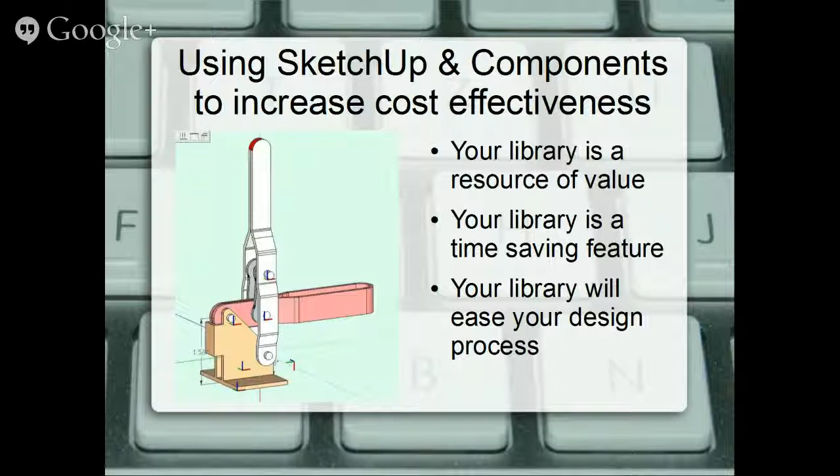With additional applets, SketchUp will improve accuracy and provide both a spreadsheet, cut list, and a pictorial layout of how to put parts on your lumber. That equals cost savings.

Then down below, you can see that it's cross-referenced with the component names. Now you can name these components whatever you want. I don't mess with it, because when I'm doing a project, if it says component 12, I look at it, I can see component 12.

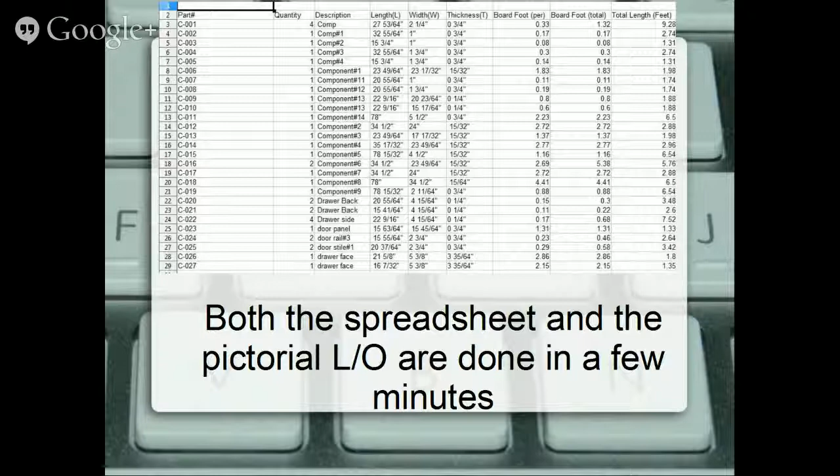Both of these outputs, once you run the applet, they call them plugins, Cutlist, they will be done in between 1 and maybe 15 minutes. I haven't run one longer than 3 minutes, but then my stuff is fairly small.

Case sides are all the same profile, same with the drawer fronts, also with the door panels. Stiles and rails also have the same profile. Now, I know you're saying, well, I make a lot of different door styles. Yes, you do. But there's got to be one that you do most of.

First, you have to isolate your bread and butter component, your bread and butter styles first. Raised panel, that's fine. Which style? These are a bunch of different styles of raised panel doors.

Are any of them better than the others? No. But what we want to do is start with your most used products to build your library from and then modify them.

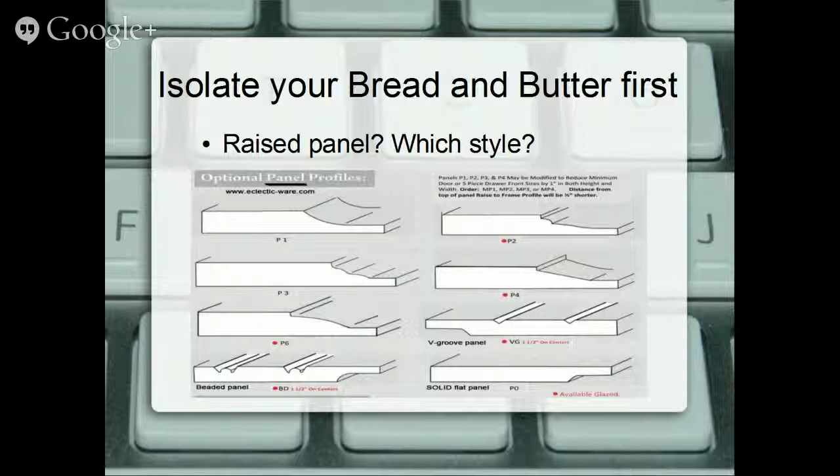My rails and stiles aren't - they're tongued and grooved. But they can be changed from that very easily. So you figure out what your main usage is and build from there.

And that's the end of the presentation, unless I missed one, which I think I did. Oh well, if I did, that's okay. Oh, I did. Okay, I will close this out. At least I'm trying to anyway.

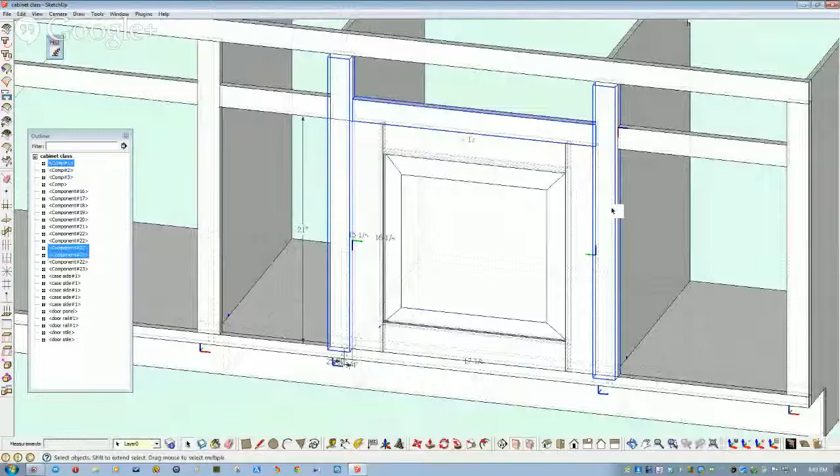This is just a simple raised panel door, tongue and grooved. You can say, well, your tongues and grooves are not right - they're not big enough, they're too big. And you're probably right. I've already admitted I really don't know what I'm doing here, but I'm trying to show you that if you do know what you're doing, it makes life a lot easier.

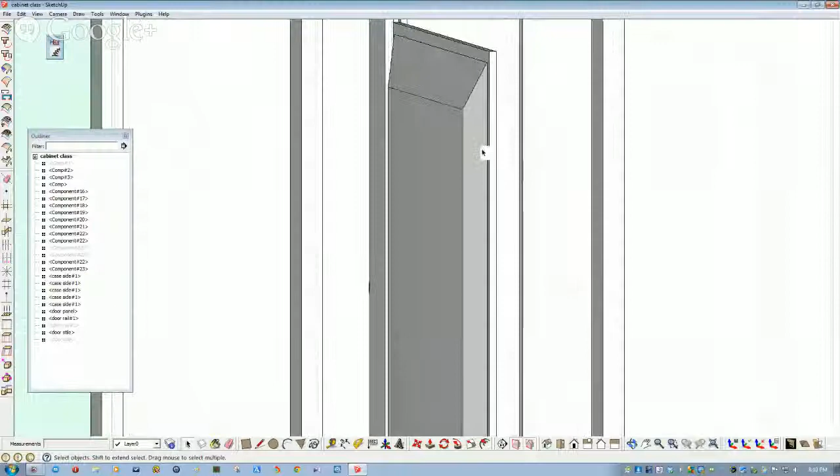So let's hide a couple more parts. And here's my simple raised panel door. Just straight cuts on it.

Now I'm going to take these parts - there are all components for my door. They're all highlighted down here, you can see in the blue. And I'm going to right-click here and make a component. And I'll call it, I think that's 24-inch door. If not, it doesn't make any difference.

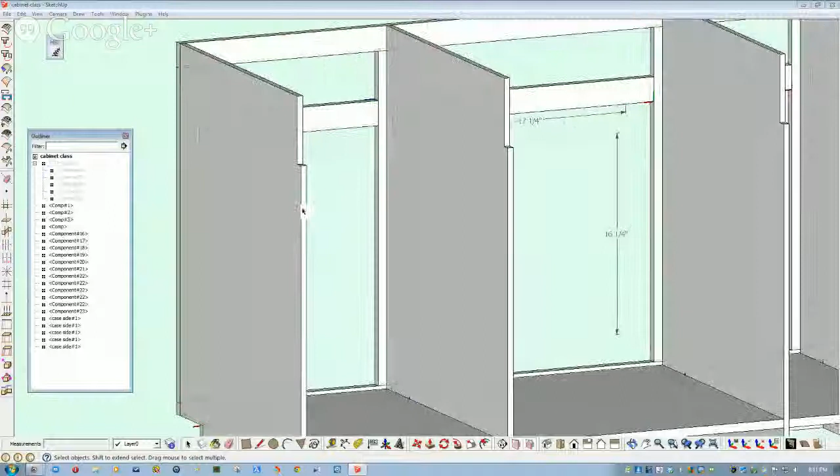Now this is now one entity that I can work with a lot easier. On my previous go-around, I had my back panel inset rabbited into here, and these were all a quarter inch narrower - 6 millimeters actually.

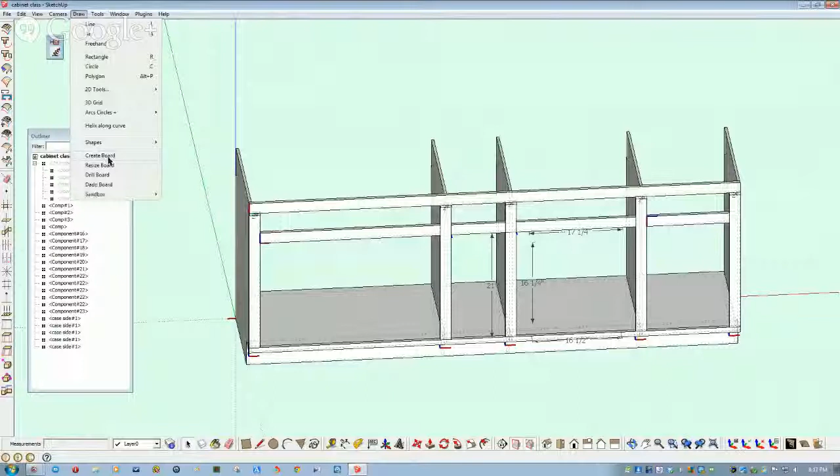Then I found out, oh, you have to have a nailing strip up here. So I just redid the whole thing. So to make a nailing strip, there's a plug-in through woodworlds.com, and you can create a board.

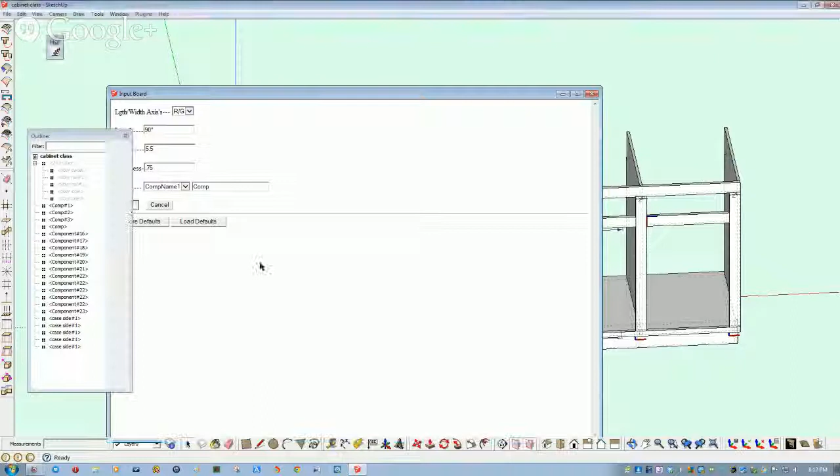I'm going to make it 96 inches, which is not long enough, and 5.5 and 0.75. Now, if you mess around with these up here and get really handy with this, you'll save yourself this stuff I'm going to have to show you. See, it came in 90 degrees out. I don't care, because I can select my rotate tool and it's now right.

Grab my component, bring it up here. Why I knew it was going to be wrong is this is not half an inch - it's slightly less because it's metric. So I'll make this component active. I'll select that in, and then I will grab this point here and drag it out.

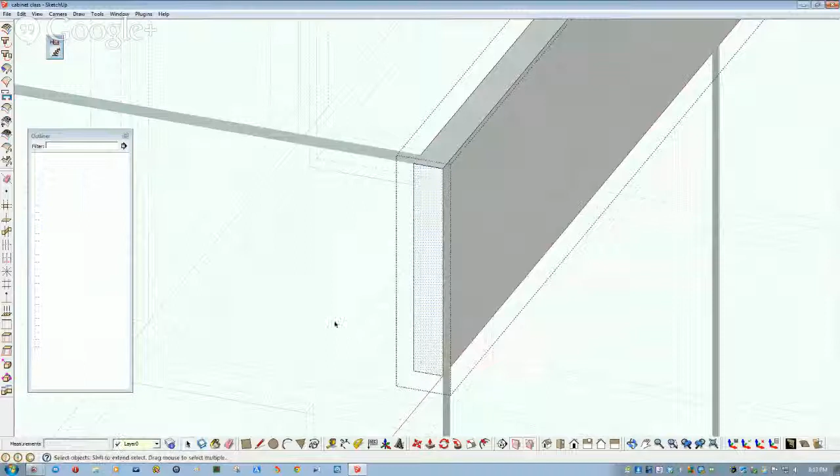Now I have my nail panel up here, which I still may be wrong, because these might all need to be a quarter inch thinner.

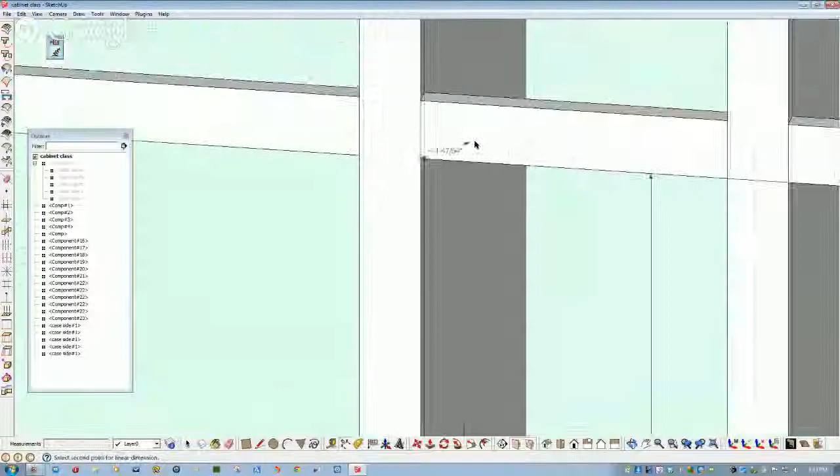Right now I don't know. So let's go ahead and create another door for this little panel, this little opening right here. I'm going to need to know what size I'm working with. That is a 21 by 10.

Now I could just take the other door I've got, make it unique, and mess around with that. But I'm just going to show you how to create the first one so you can have it in your components. I have got, for this class, I set up a file.

Sketchup 8 itself has this component file. I created one called VAW Cabinet Components. I'm going to bring in my stile, and you can see it is out of phase.

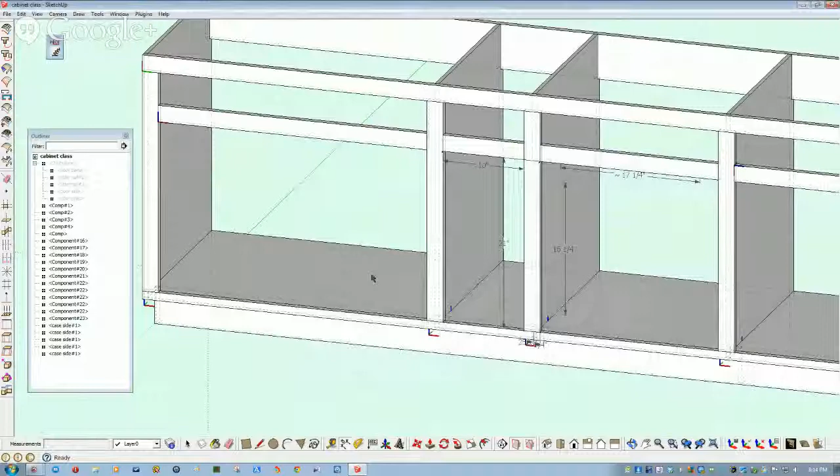That's okay again, because I can have it like this and rotate it. Oops, I rotated it the wrong way. See, it doesn't really make any difference if you goof it up the first time because you can re-grab it very easily. It's just being kind of a nuisance.

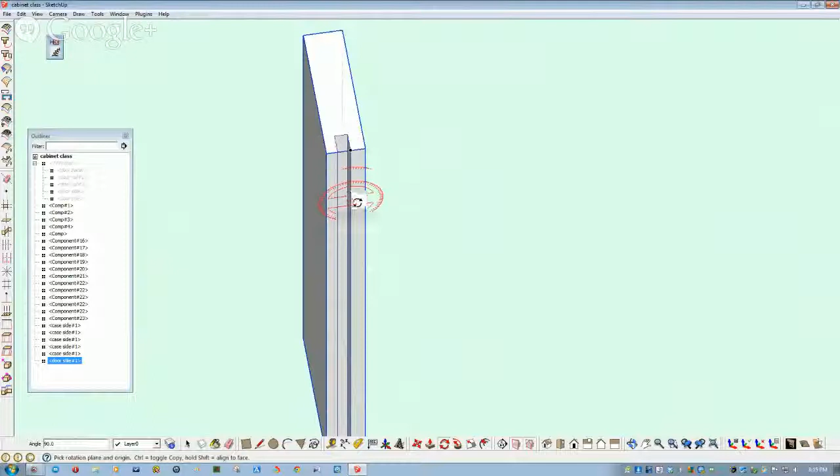Okay, down below the lower left-hand side, you can see where it says angle. It is now 90 degrees. Now, one thing I goofed on - I don't have my dado, or my groove, in the center. So that kind of makes things a little bit more difficult.

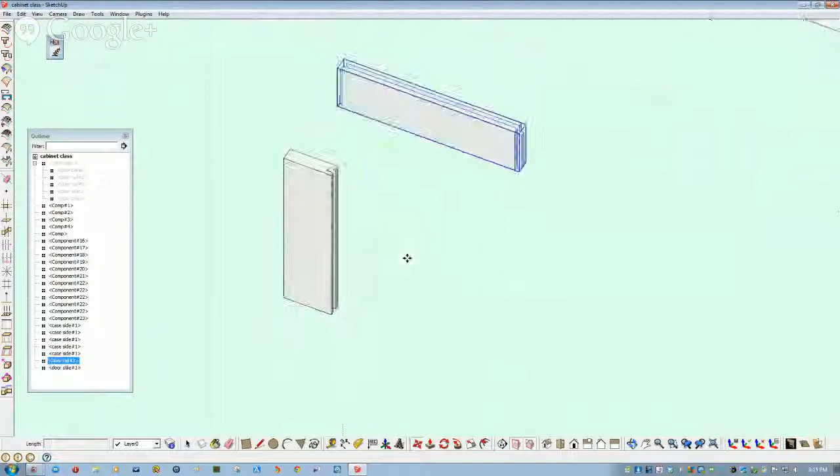Because when I bring in - I'm going to do that right now and show you how it messes up. File, import again, and it opens up to where you were last time. I'll bring in my rail, and I'm just going to move that over, kind of close it, you can see the problem.

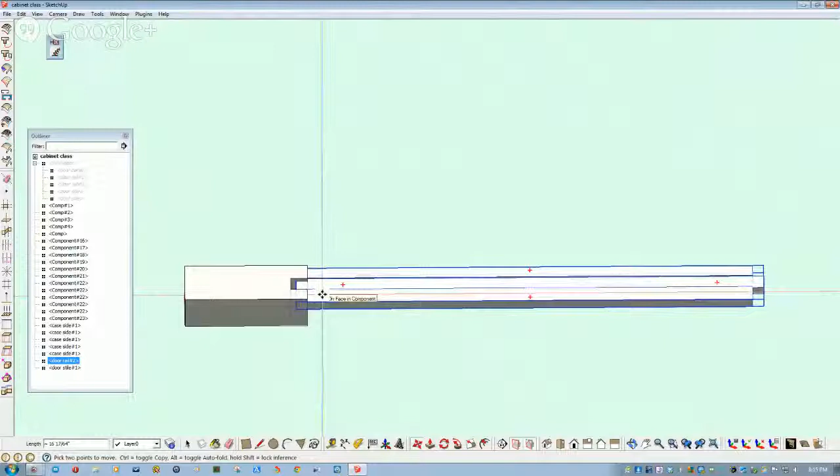One of them is wrong, and I'll admit that. So I think I want the fuller back, the offset toward the back of this door. Now, I may have done it backwards on the one before, but we'll just do it this way, and then we'll work from there. Go to rotate again, grab this, and just pull it over 180 degrees. As you can see down in the angle area again.

Now, I'm going to make this part active, and I'm going to put a dimension on it. So I've got to make it active again. That's 10 inches. I need it 21.

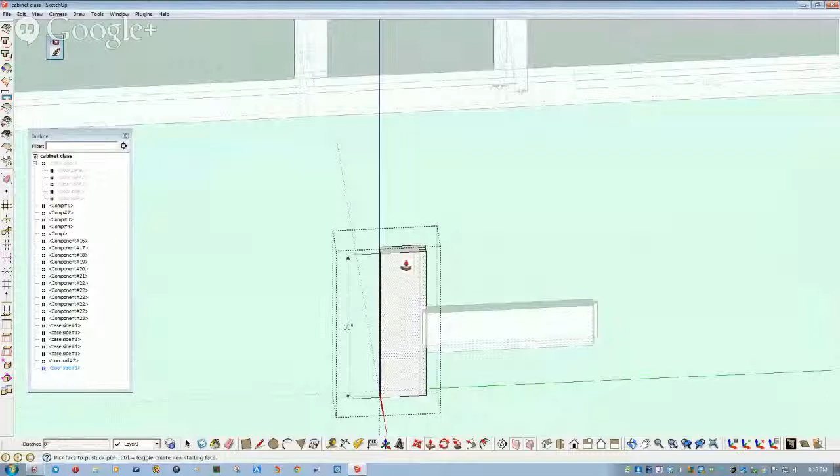So I'm going to grab it at the top, and I'm going to extrude it up maybe 11 inches. Now I have a 21-inch stile. Yeah.

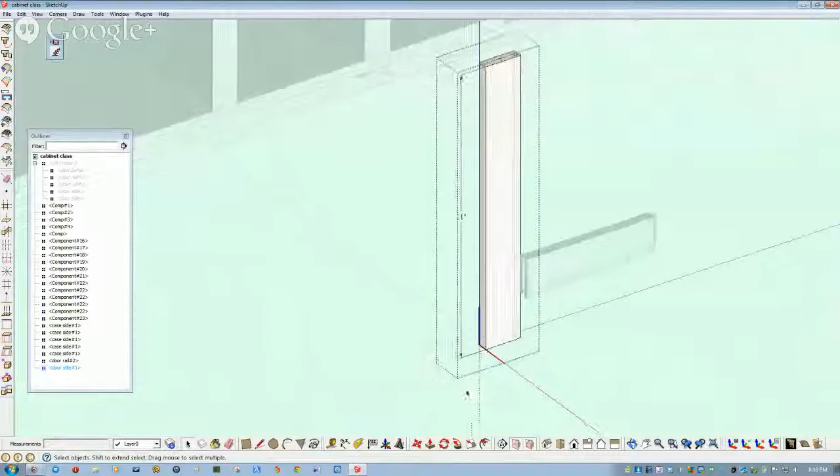Now I'm going to - well, I'm not going to cheat that way. I'm going to go ahead and put it in. Once you get using this - no, I'm not going to do it that way because I was still active in that part. You better make sure that when you are doing things, that's not light blue over here, because it means it's active, even though there's little dotted lines around it.

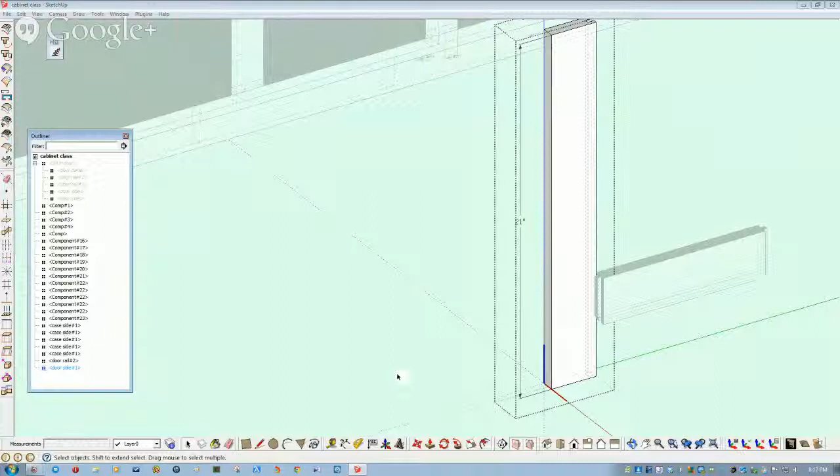There's a whole bunch of cues to tell you you're screwing up. Pay attention to the cues. You got to learn your rule. Even though I've done it for a long time, I get ahead of myself and don't pay attention to what I'm doing.

Now, I'm going to rotate this around, try to figure out how long a rail is going to be. If I grab the wrong one. Why did it not go 180? There.

You always have to look at your cues here. Kind of got to mind your P's and Q's. Now this is going to be a very short, weird door. On this one, you may suggest to your customers that they really don't want it like this.

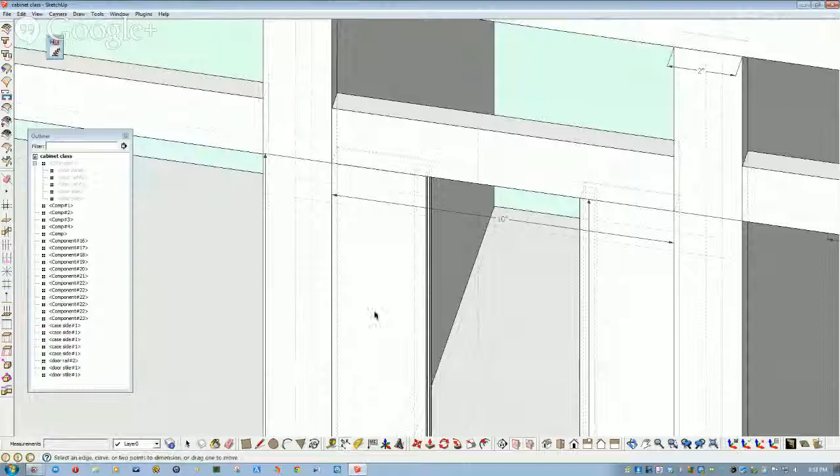I'm going to make this one active, and I'm going to put a dimension right there. And it is also 10 inches. Now I'll go back up to here and get a dimension from this corner to this corner. That's 4.5. So this is going to be really skinny.

Make that active. Select from the top left to the bottom right. I'll show you what happens if you select the other way. You get everything, and your part's going to really act squirrely.

So you have to watch what you're doing, and it's really, once you screw it up a couple times, you begin to figure it out. Except I do it wrong about 3 times out of 10. Oh, crap! I didn't redo it.

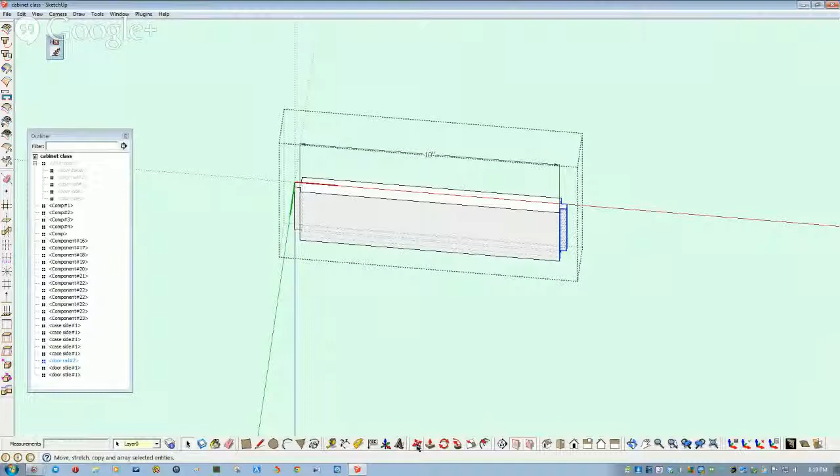This icon here is to move. So I'm going to select a point here and give it a direction. And 5.5 should give me a 4.5-inch part.

I'm also going to take the same part, because I need it twice, and I'm going to rotate it around, holding the control key down. And I'll move this up into position.

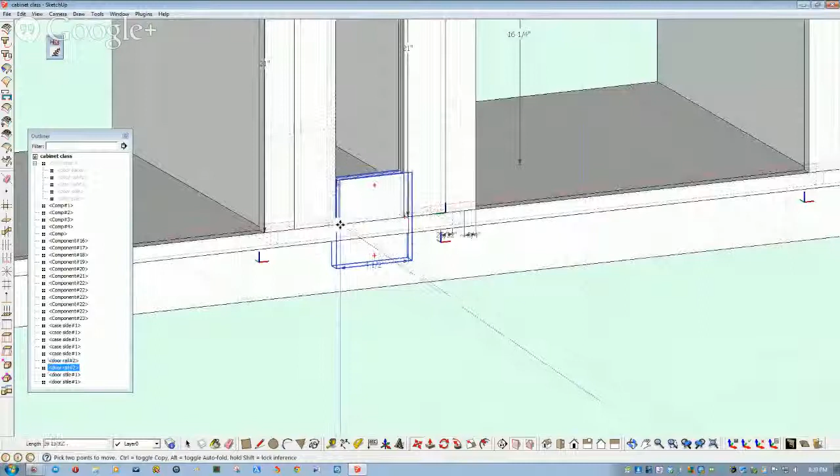Now I will do the same thing for my bottom one. Hit the space bar to clear out your selection. Grab the outside corner, because that's our control feature. Now, we have...

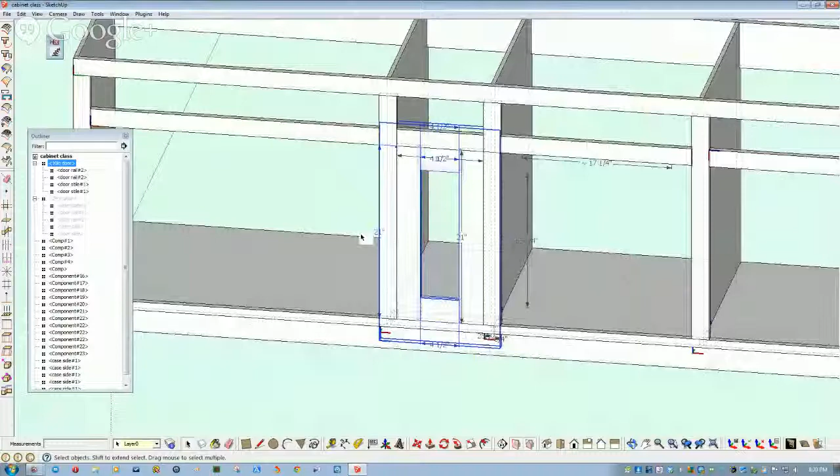Now, we're going to import the door panel itself. We're going to end up with something really ugly, because this dimension from here to here is 1 5/8 inches. I'll just go ahead and do it.

What I need is this dimension to be - well, no, I want to do something else. Control Z, Control Z.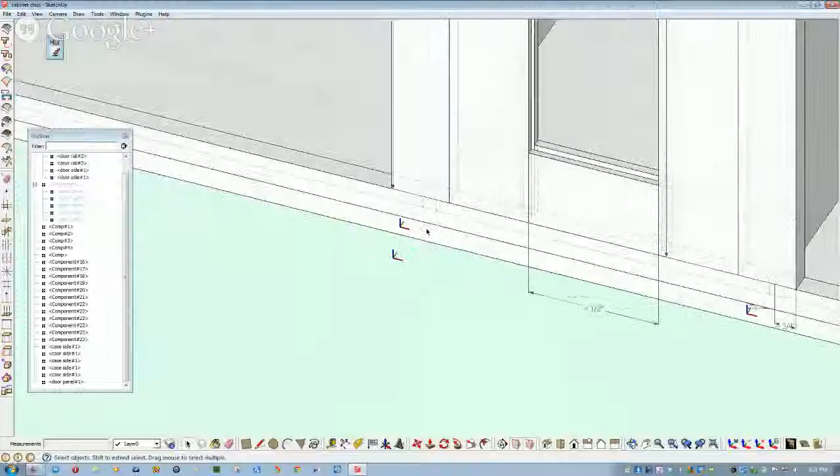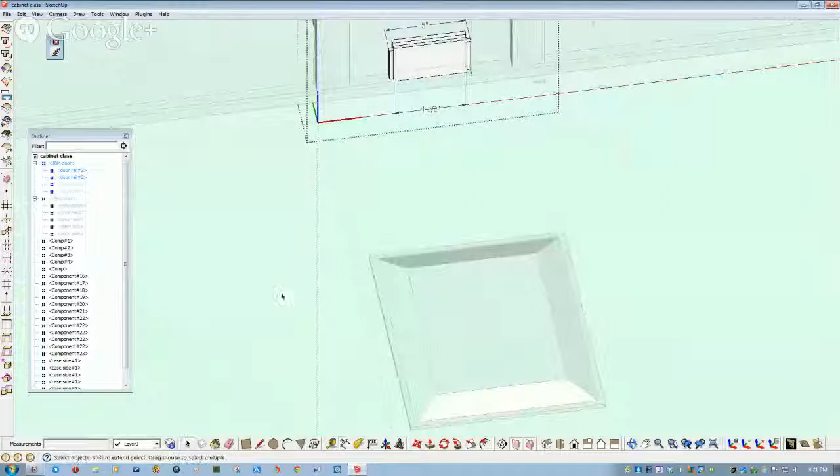I want the overall to be this dimension right here, which is 5 inches. Okay, so now I'll make this active, put my dimension in here, do the same thing, hit the space bar to clear it out.

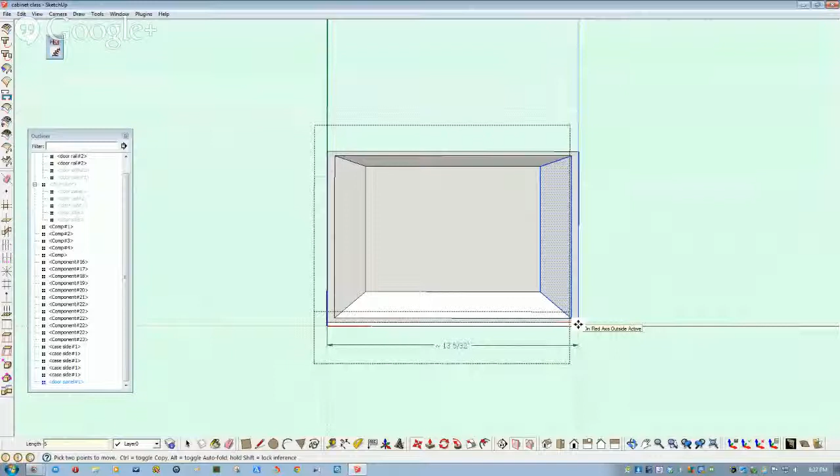There, I've got information trapped. Select here, and what was the dimension? 5 inches. Let's go 7, because I forgot what. Let's go 5. And it didn't work.

I went the wrong way. Now, 5 inches this way. Is that going to work? No, because I wanted it to be 5 inches, I didn't want to move it 5 inches.

So we'll grab it again, pick my move icon, and move it 2 more inches. Now, if you think that looks kind of ugly, so do I, but you may, in your wisdom and knowledge, know how to make that visually pleasing for your customer.

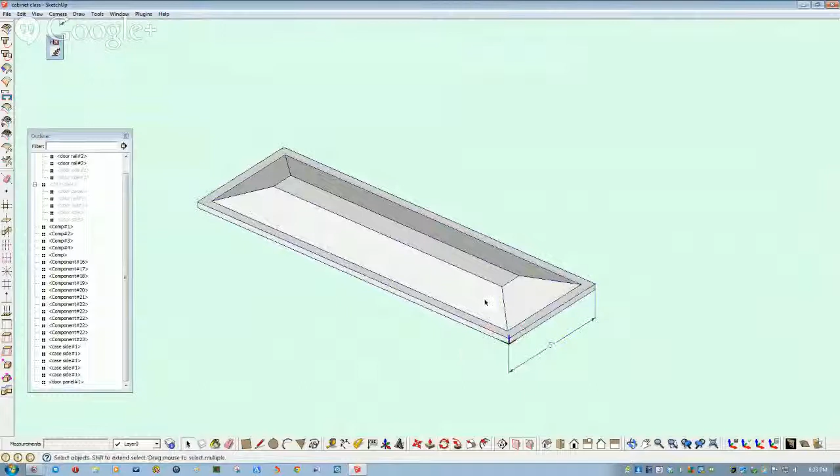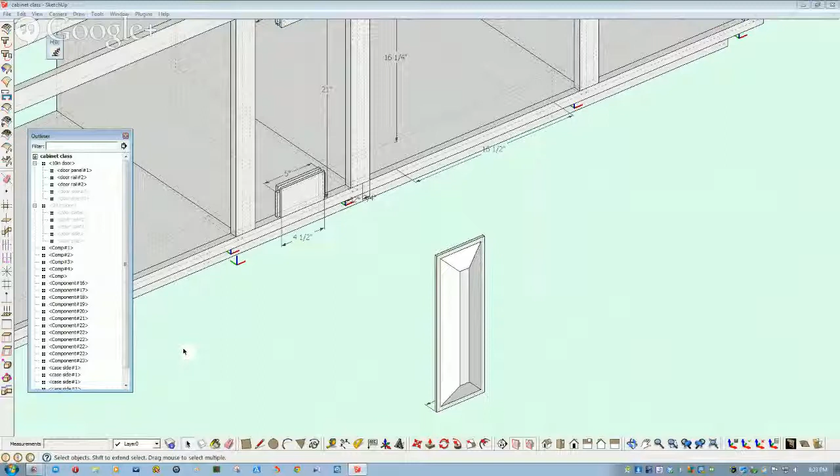Now, what we have, though, is a piece outside of our door. So I don't want to bring that in there. But I do want to take this panel, and I want to put it inside of my 10-inch door. That's how easy it is. It's like moving files in Windows—you grab it, you just drag it where you want it.

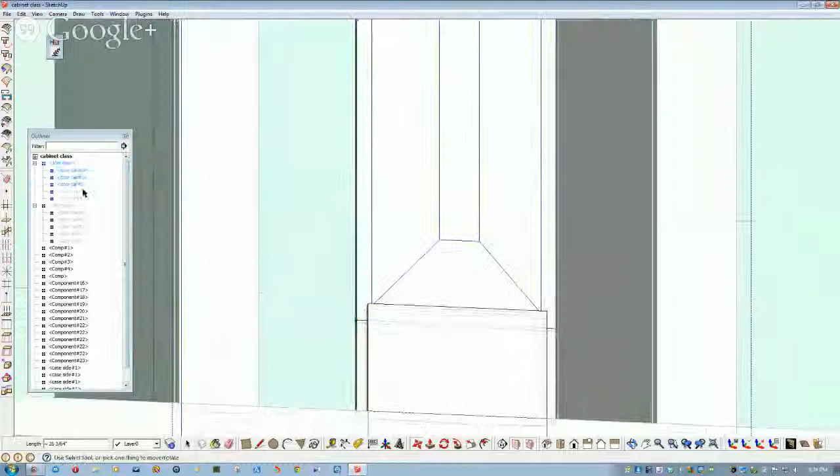Now let's go ahead and make this door active. I want to take my door panel and plunk it right there. It lines up nice, very pretty, and I'm going to unhide.

Oh yeah, I forgot one thing. Forgot to tell it how high to make it, didn't I? Oh, that's okay. Let's hide these 3 pieces.

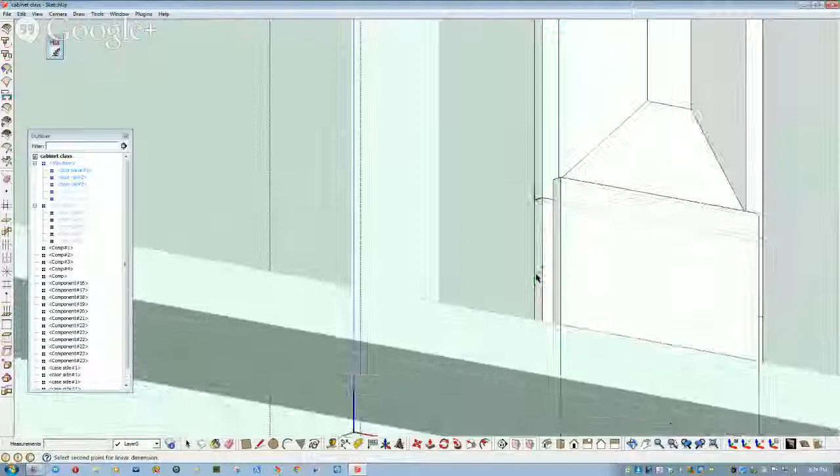And actually, undo that, hide these two, and then find out this dimension from here to here. And that is 16 1/4.

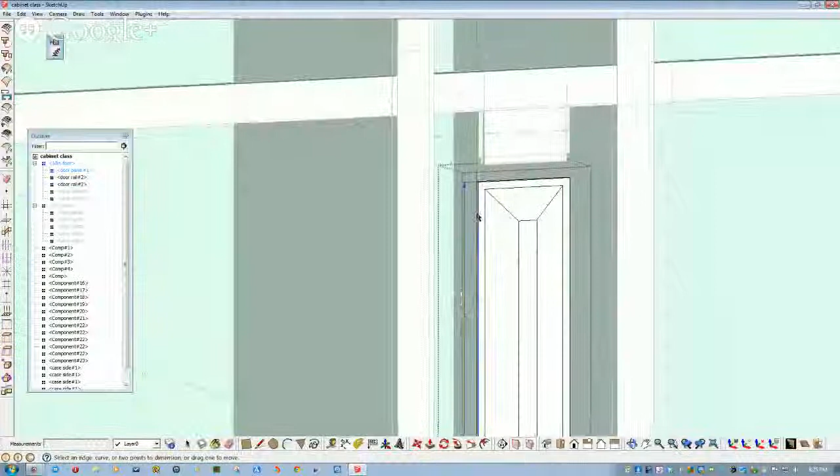And now we'll make this one active and get that dimension. And I'm going to do something you're going to tell me is wrong, and you're right—I'll let you know that right now. I'm going to make it full depth, but I know you don't. Actually, no, I'm not, because I see what I do down here. Perfect.

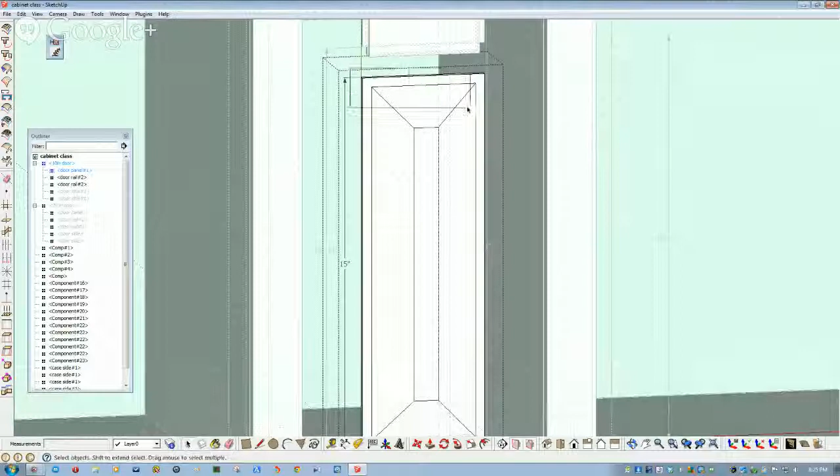Okay, I'm going to grab up here, and I'm going to move this up. .125, let's try that. I'll leave that. Nope. 1 inch even. There. Now I'll grab this door panel and move it up 1/8 of an inch.

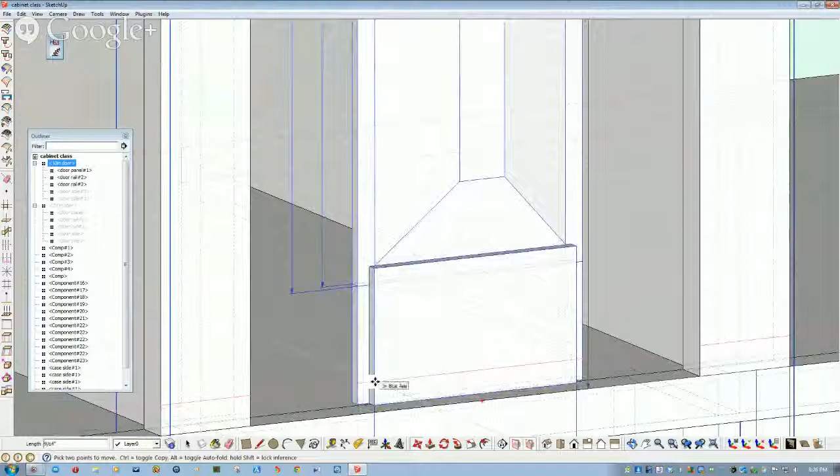There. And yeah, it's kind of a nuisance sometimes when you're doing this, but it sometimes just wants to do what it wants to.

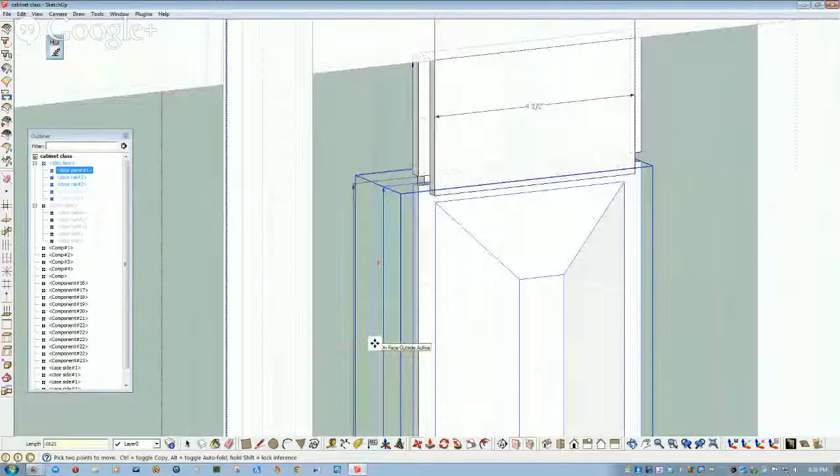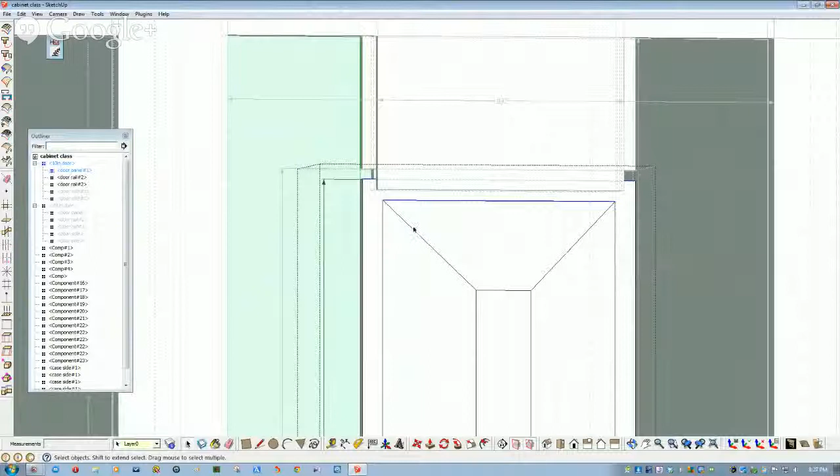The 1/8 of an inch gap is probably too much. So I'm going to go back to 0.0625, and I'm going to make this one 1/8 of an inch longer. And we'll go ahead and move this one, get my dimension here so I can see it. 0.125. There, hit space bar to clear things out, unhide my two components here.

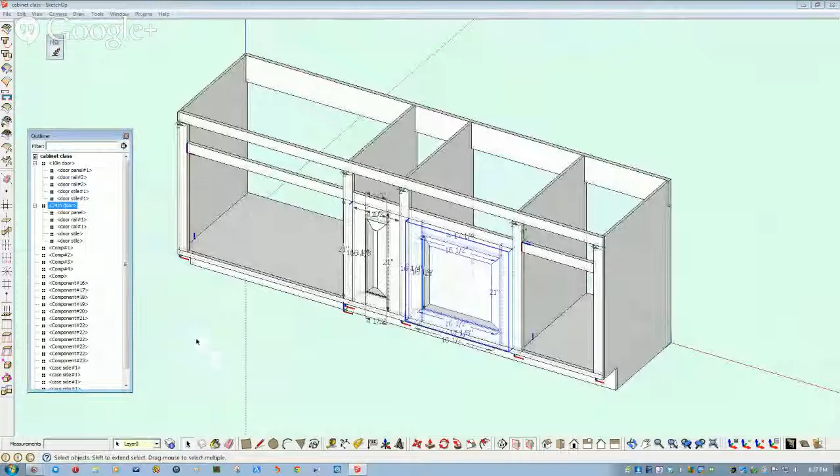And now I have a door that probably should be a little bit wider. It's your preference on how you like your doors made. Now I've created a brand new door. I'm going to save this because I actually kind of like how it looks. I may even use it in my house when I finally know what I'm doing.

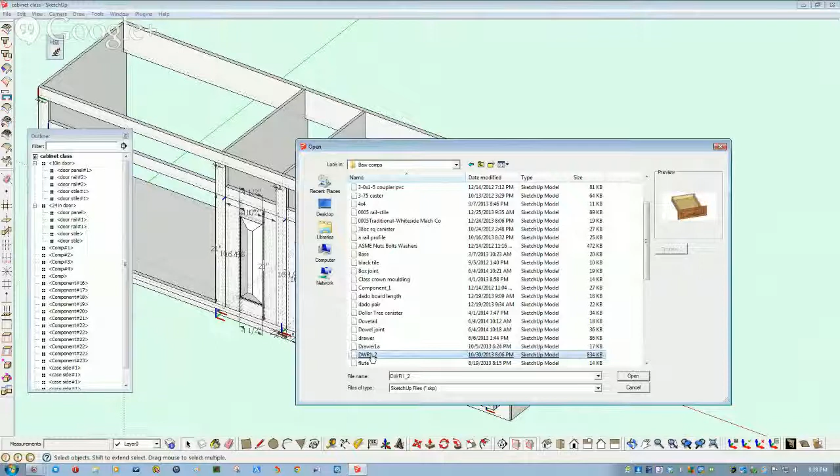So I'll save that. I'm going to import. I don't have a drawer here, so let me go up into my other components. And I should have a drawer, like that one. Let's bring this one in.

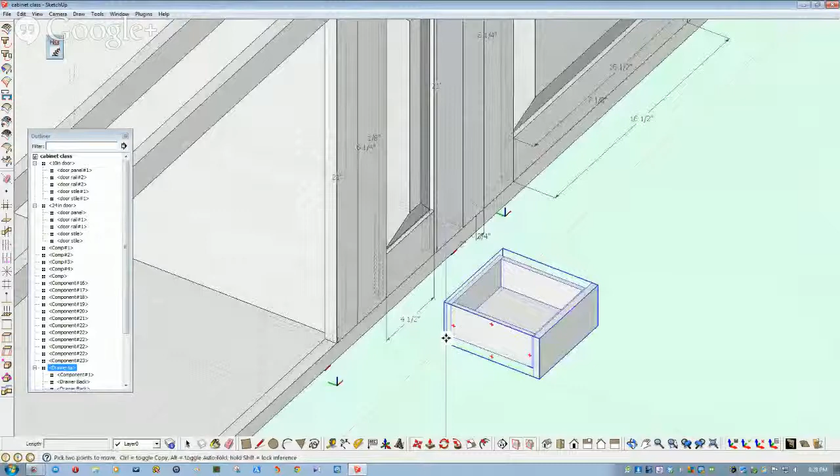Okay, this is just a simple drawer. We're going to make it fit in the small opening first. Drag it, bring it up here. Now you can see there's several things wrong with it.

A lot of people will say use this tool right here, use scale. No, because when you scale it, your wood thickness goes berserk. What you need to do—we know that this has got to be bigger—I'm going to draw it with an interference fit.

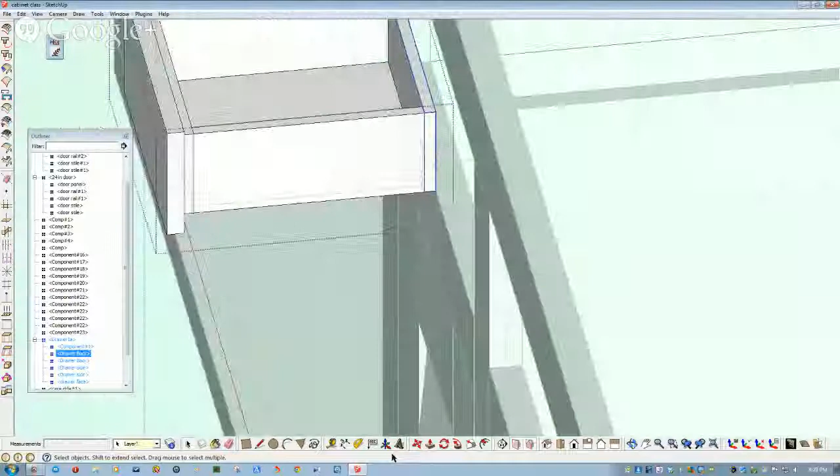I know that's wrong. Just bear with me because I'm trying to show you what to do, not all of the proper techniques. So I have a drawer back, I have it set up right. I'm active. What I want to do—I didn't have it active. There, now it's active.

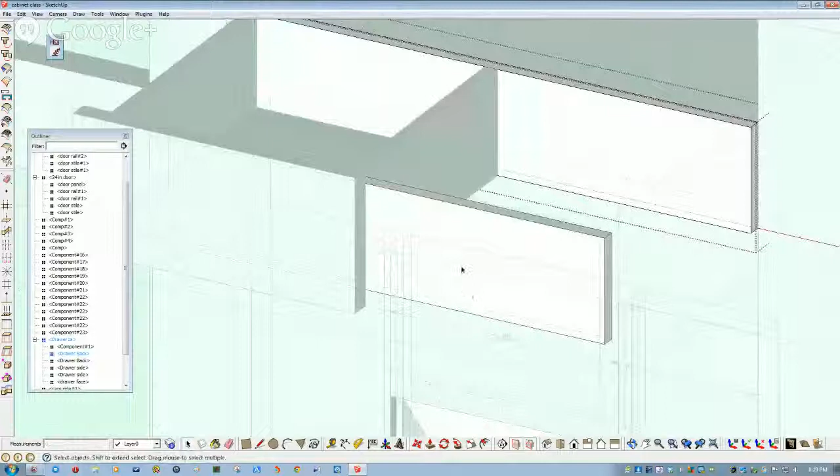I want to take this, I want the corner there. Now, you'll say, why did that part come up too? Well, you notice I have two drawer backs in this thing. This may not be accurate for what you're trying to do, because these are just simple butt joints.

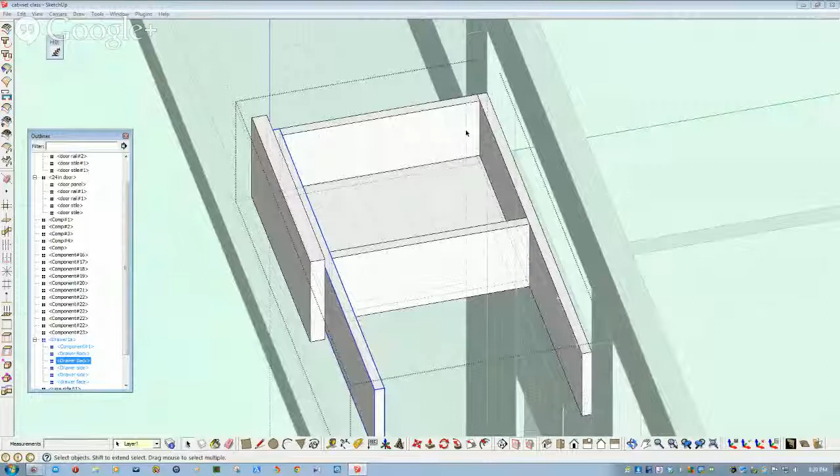Now, I could use dowels, I could use biscuits. I don't have a biscuit joiner. I could use pocket hole screws. There's a lot of ways to do it. You have to know your normal process, your bread and butter, and that will determine if this part and this part are the same, or if one's the front and one's the back. In fact, you may have just single drawer fronts. You don't even have to do it this way.

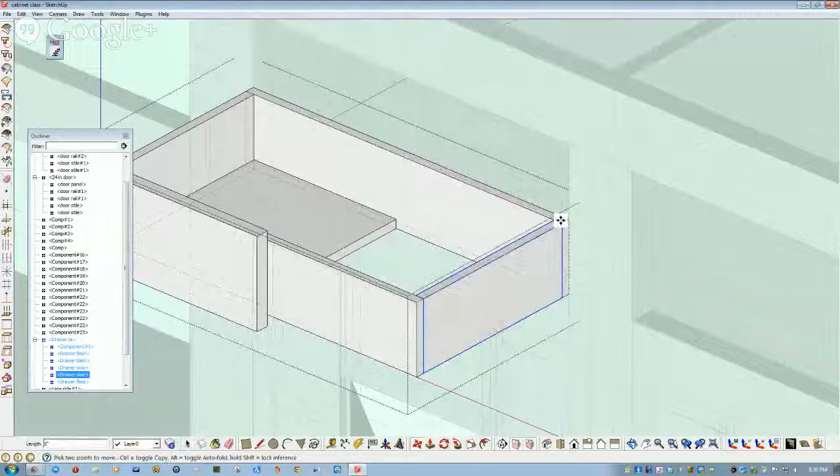So now I'm going to activate this part, and I'm going to bring it over there, and it moved 5 inches. I wanted to know that because I need to make this 5 inches bigger.

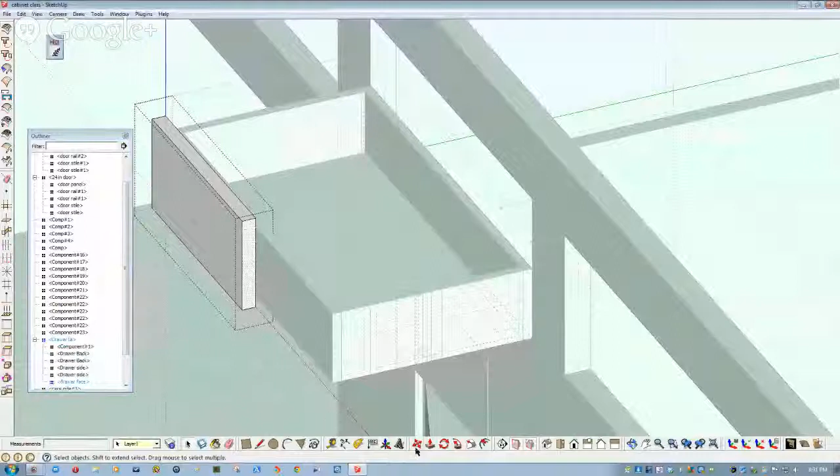And I need, come on, here. There, drawer face. I need this 5 inches bigger. And I didn't have to key it back in because it remembered my last command. So now we have a drawer that's probably a little too short, guys.

So let's take this whole drawer assembly and move it into position. I'll grab from here to here. Then I'm doing it wrong. I don't have my height right, so the way I was moving it was wrong. There. Now we have a stretched and smushed drawer.

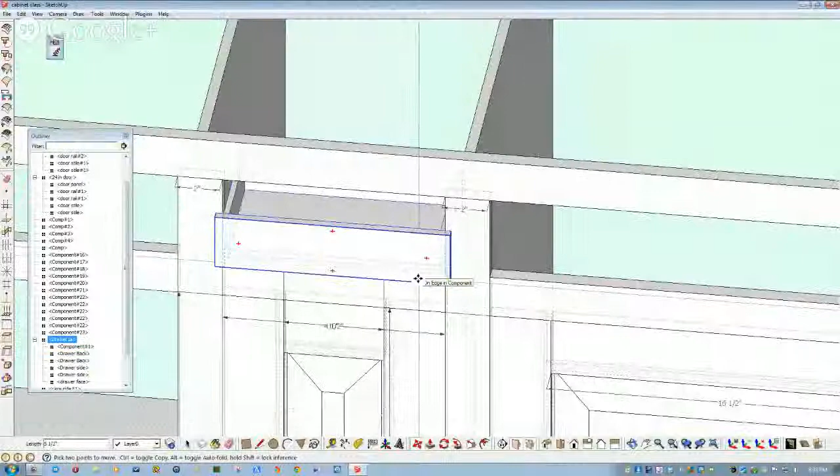Let's make it longer first. There. Currently it is 5 inches internal. I did this for another project, that's why it's so small. Actually, I did it for one of my kids' boxes.

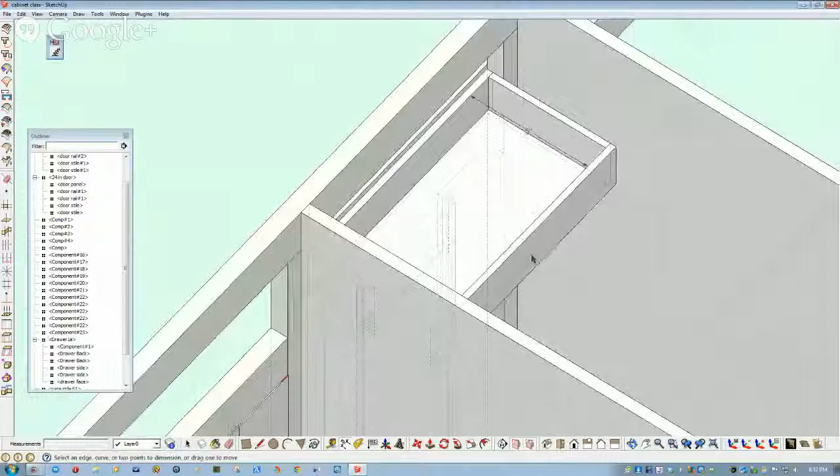So to make this active again, I'll take the side to make it active and not just make another dimension. I'm going to move this out 13 inches, so my drawer is 18 inches deep. Now, is it deep enough? Probably not, but that's what I'm going to do right now, because this is a little skinny drawer.

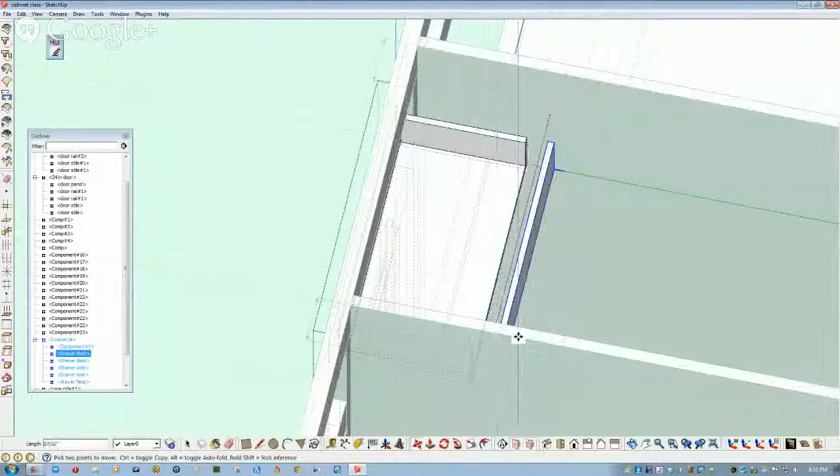Okay, I know that dimension. Therefore I can make this one active and make that 18 inches. I can make this one active. Now you're going to see something probably pretty funny.

I'm going to go ahead and make this one the same dimension. Oh, I put them together intelligently -- except I didn't, because it got way too big. Why did you do that? Good question, let's change that. I actually thought this side of the drawer was going to go way out front.

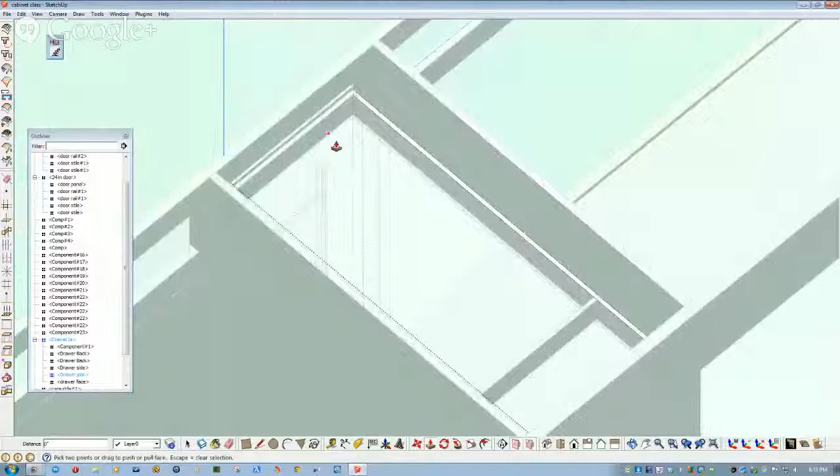I actually moved it side to side rather than rotating it. Sometimes if you rotate things, it doesn't like it. Okay, let's see if we can move this back up to here. Yeah, 5 inches too long. That one's fixed.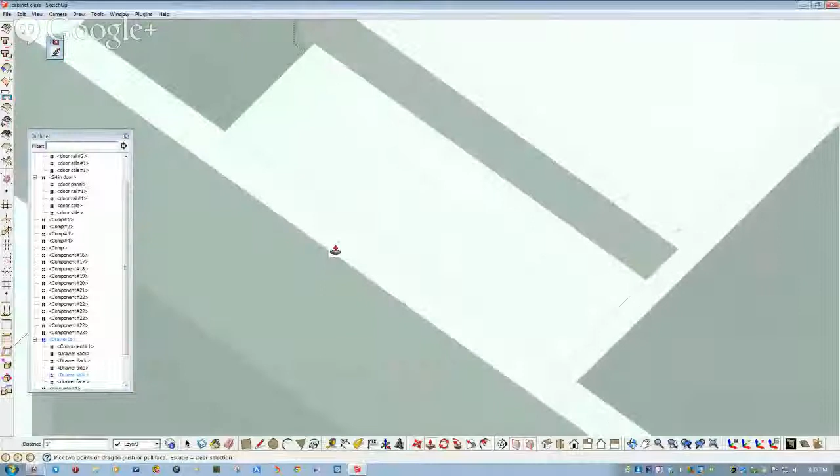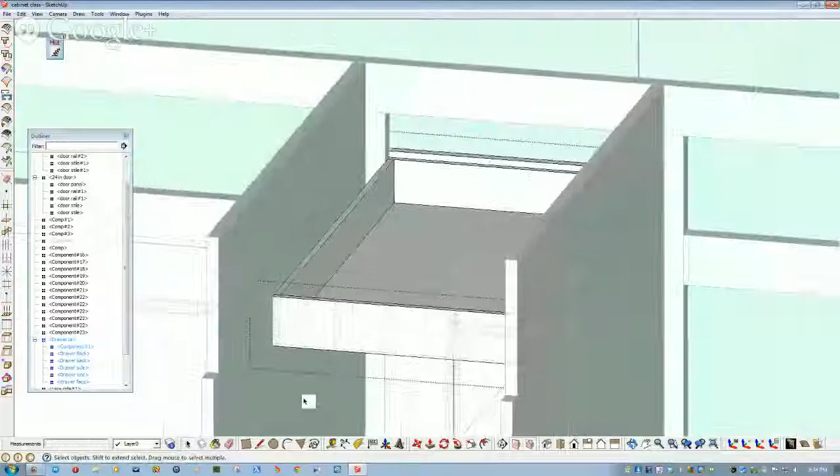Let's grab this and hide it. The hide function is very nice. There, now we have a drawer that doesn't fit our opening. I made this opening a goofball size.

I did it deliberately, so I'm going to make my front, or my drawer again, my drawer back -- I'm going to bring it up. I'm going to watch my dimension down here.

But I don't want it. Let's do 1 3/4, let's make it a little bit more. Let's make it 1.875. There, I will live with that. I could make it a full 2 inches, just don't want to.

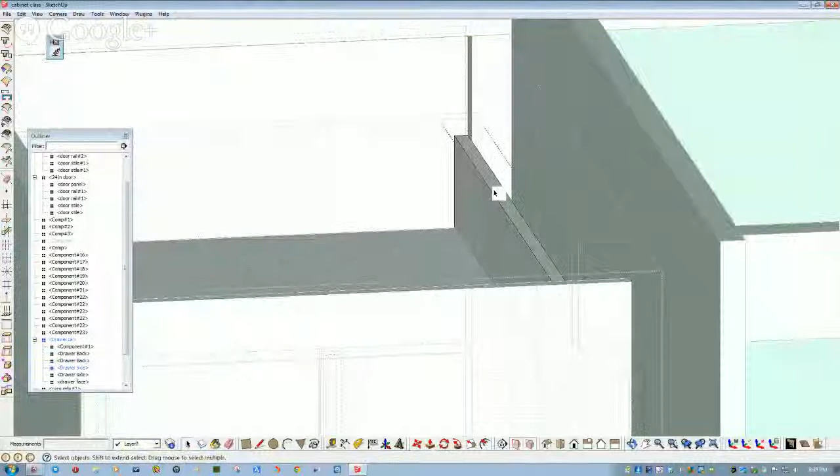That's one nice thing about this -- you don't have to do it the same way all the time. A lot of times you can do on-the-fly changes because that's exactly what you want.

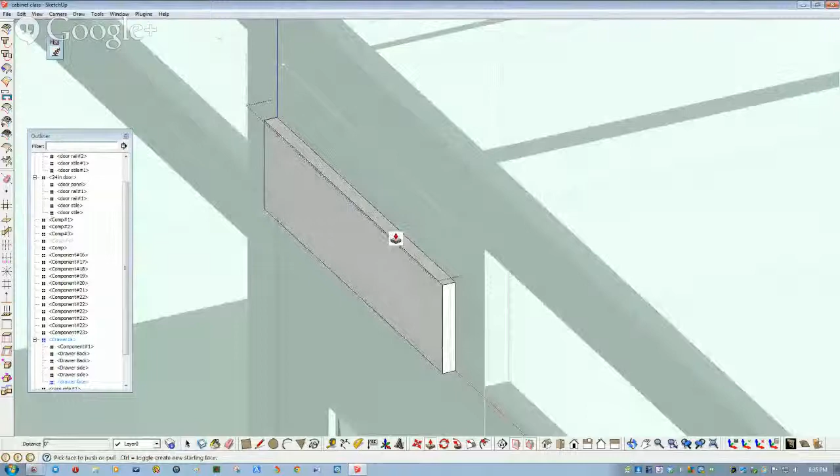Now I have everything set up except my fascia. So I'll go to my drawer front, make that active, and I will do this the same amount, even though it's not going to have my reveal right -- I think that's the right term -- even though it covers. Let's bring it up another 0.25. So now we have a drawer here.

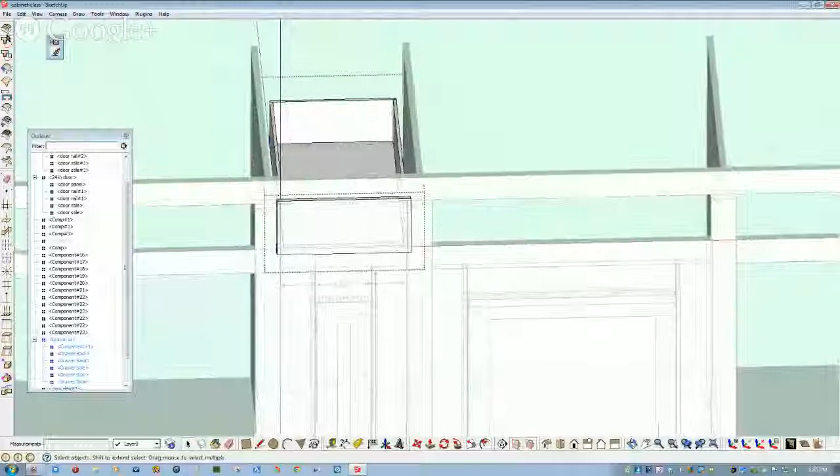Let's save this thing again. I'm going to take the same drawer and move it over into my very large opening. To do that, I'm going to hide the fascia because I want this corner to move.

So now, select that one, make it active to move, not active to edit. And select this and go from here, holding the control key down. And now I have 2 drawer 1As, which is going to be kind of inconvenient because this is bigger.

I'm going to unhide this. And I'm going to make all of these -- well, it won't let me. Okay, I'll make this one unique. And I'll make all -- no, I don't have to make them all unique. I've got to make the backs unique, the bottom unique -- hit the wrong key.

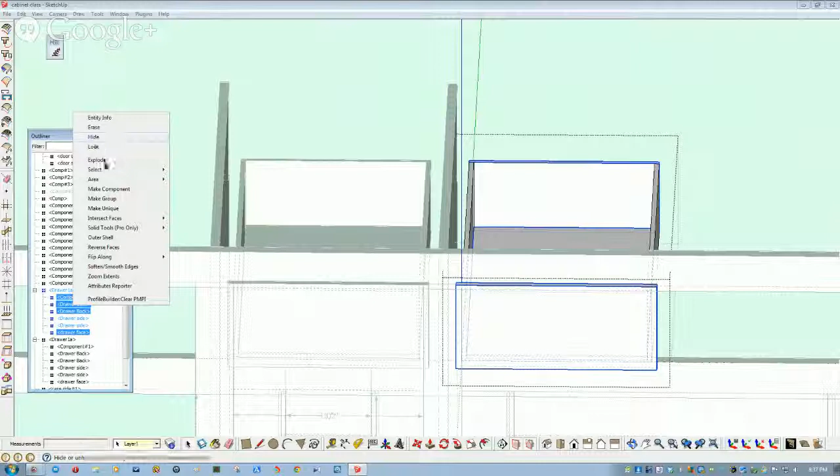Okay, component 1, which is -- I'm also editing the wrong one. Component 1 is the bottom, drawer back is the front, and the drawer face needs to be unique. Our side pieces are all the same. What you can do is set up a dummy component. I'm trying to talk while I'm trying to do something. Let me make these unique so I don't screw up anymore.

You can have one of these. If you make a lot of 4-inch boxes, you can make it 4 inches and make it the same length, and then just do the process I'm going to show you now.

So now I have this unique piece. I'm going to hide that front because it's in the way. I'm going to take my front piece and extend that. I'm going to select this face and try to bring it out.

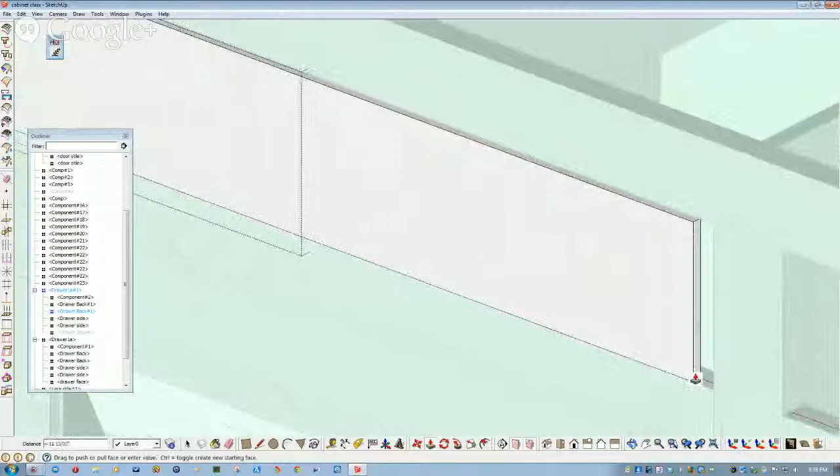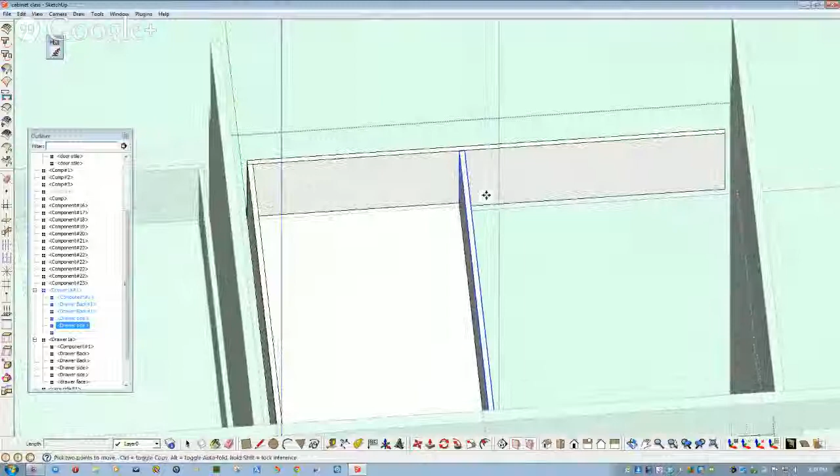I'm going to force it to be 12 inches. Now I will select this piece and move it 12 inches. I can either key it in or use an inference point, so that's what I'll do to show you another way to get things moving.

Now you need to extrude this out that same 12 inches again, and hopefully it will remember 12 inches. And it did. Now I need to unhide my drawer face, activate it, and do the same 12-inch movement to it.

Now we have a lot more new components in here. Let's go ahead and put my component 4 back in, my nailer board there, and unhide that one.

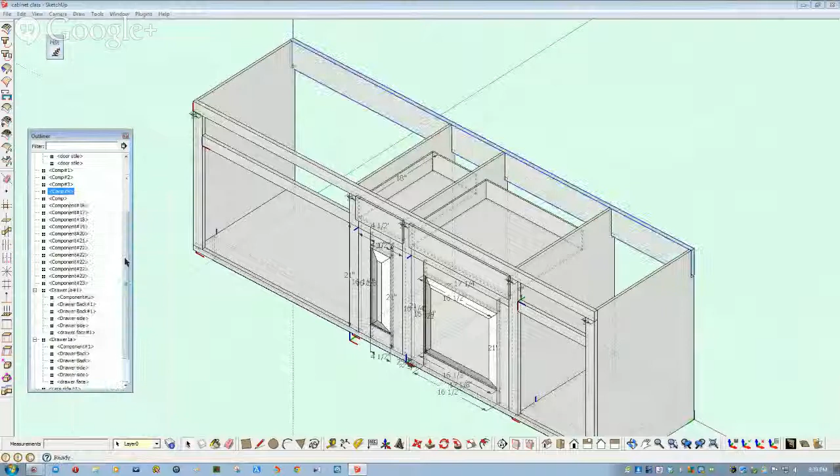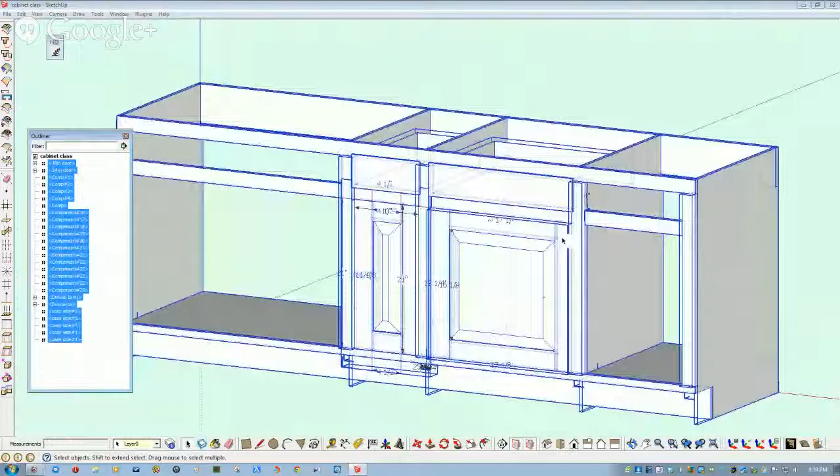Let's collapse everything. In fact, let's collapse all. Now I want to select all of these parts, and there would just be a lot of figuring going on in here to figure out how many parts I'm going to cut, how long.

Under plugin, cut list - my cut list does not work right. I just replaced it, it gives me the same error every time. Nobody else has that problem, so I'm not blaming Cutlist, it's just me.

I'm going to put it to a web page, but if you output to these files, they're editable, and they go into your folder where the part is resident. You can open this one with either Microsoft Office - I don't know if you can open it with Microsoft Works - but you can also open it with OpenOffice, which is a free program.

If you're like me and don't really like to use pirated stuff, OpenOffice is the way to go. In fact, I'll leave that running on both of them, I'll just run all of them. I don't know if the SVG file is going to work or not. Sorted by size, let's see what happens.

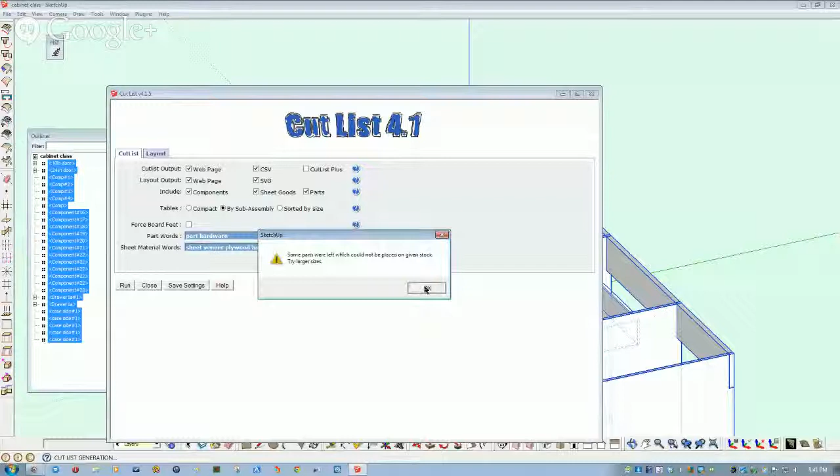Let's do it by subassembly. Now we're going to get some error messages here - this one: some parts were left which could not be placed on given stock. They're my sheet stock, and I don't know if that's because I made it metric or what, but anyway we'll get a printout of them through these silly messages right here.

Cut list written into SU models cabinet class cut list CSV - I'm not going to worry about that right now. And yes, we have the model error here. It also wrote the SVG files into this thing, so we're going to have to go into that because there's nothing here.

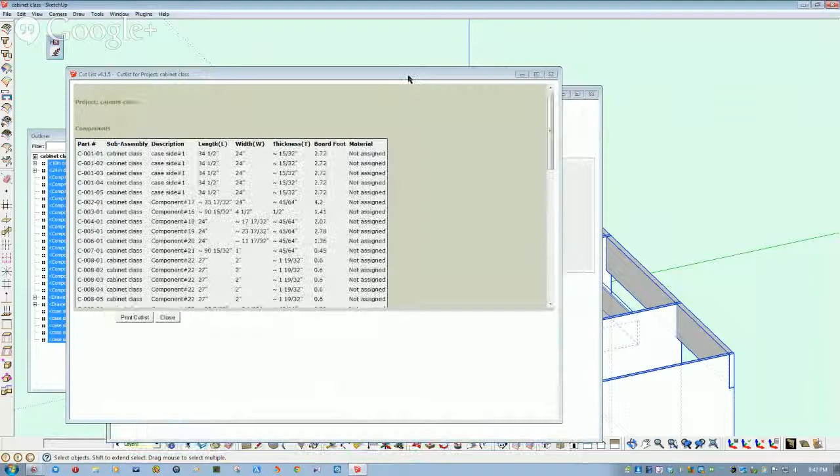It doesn't give me the print preview I want, and it's not going to let me give it a preview. Okay, I'll just cancel that one. But here is a copy - that's how long it took, by the way, guys.

All these new components are set up by components and classes and all the names and everything, so I'm going to turn this off if I can remember where it said it. Go into my drive here, my SU models, and cabinet cut list - this is going to give me an error message.

Well, no, because I already imported the other one - that's great. Now I have a spreadsheet. Tells me the sides, tells me what I've got, lengths I have to cut them, total board feet, and it's even giving me my...

Large sizes - that shouldn't have been in there. I didn't select it, but that's how long that component, the whole thing, really is. So it gives you all these wonderful dimensions. I'm going to save this.

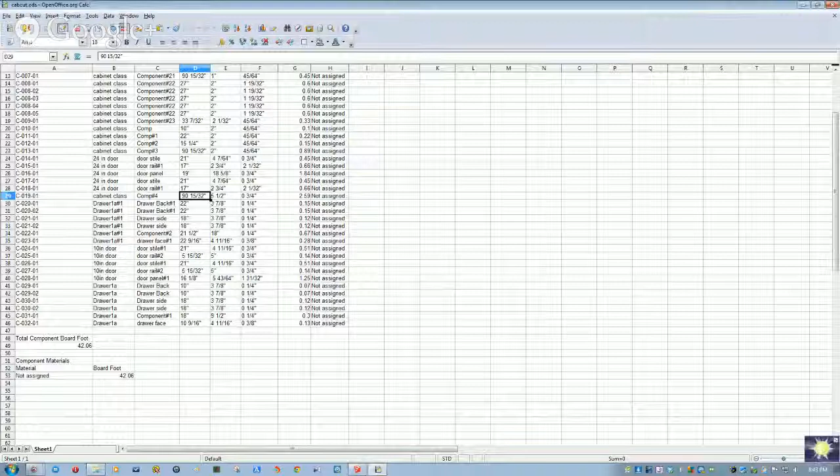Right now I'm just going to call it that because I already have another one called Cabinet Cut List. There, that's hidden. And now we can look at our parts layouts, the way it decided to put them on our boards.